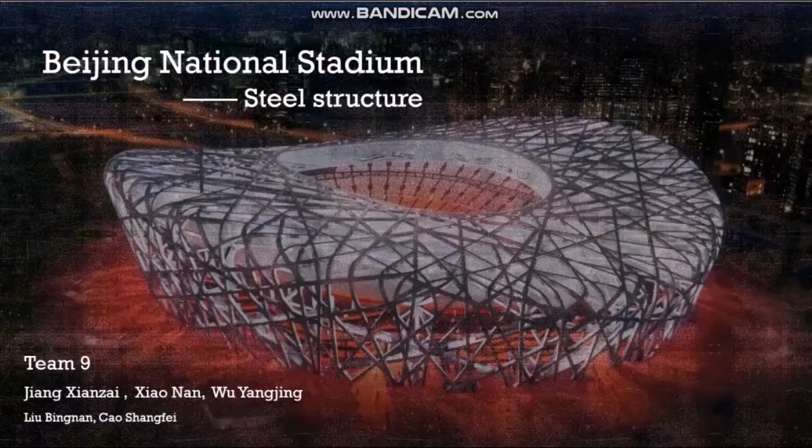Cao Shangfei. This week, we will introduce the steel structure of Beijing Stadium. The content is foundations and twisted element, challenge, and superstructure.

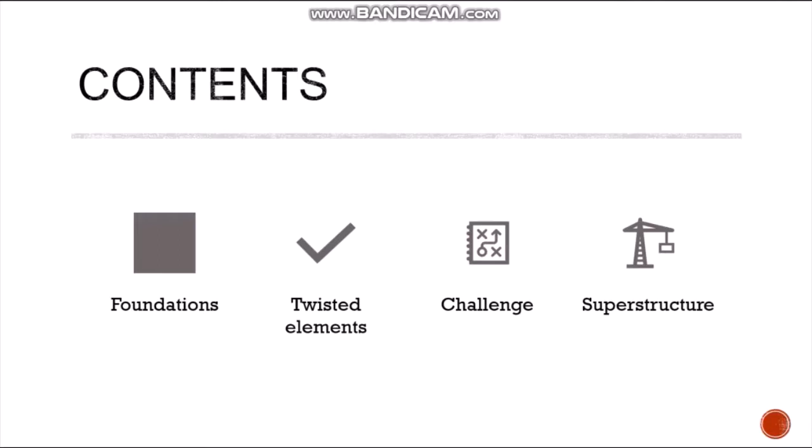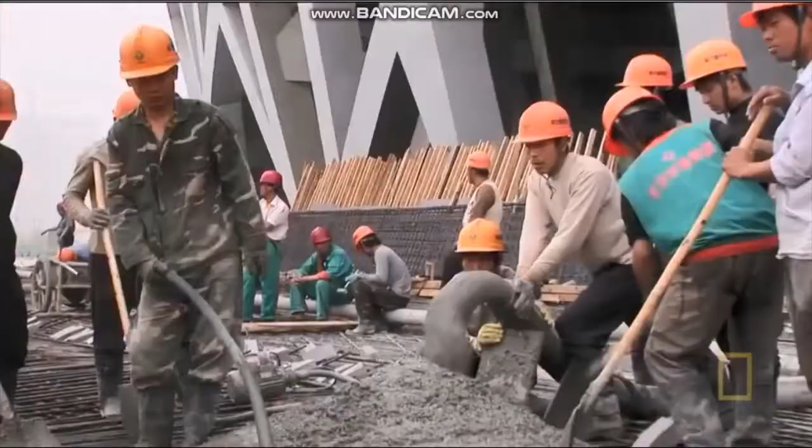Henry Zhang of the National Stadium wastes no time and assembles thousands of workers. The construction accelerates. We put in 7,000 people working around the clock in 3 shifts a day.

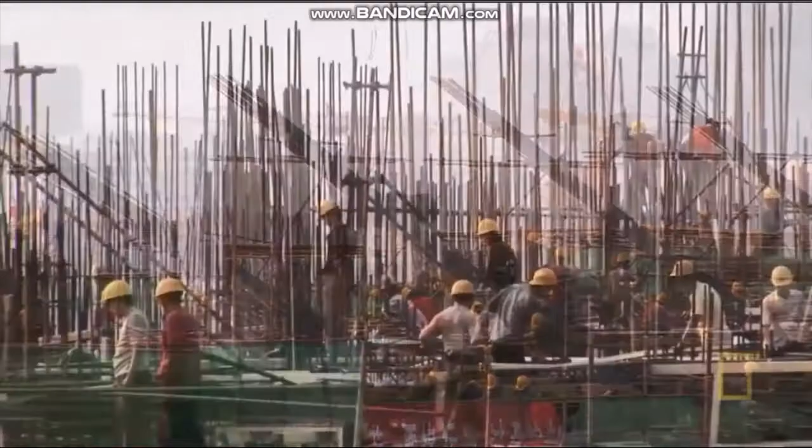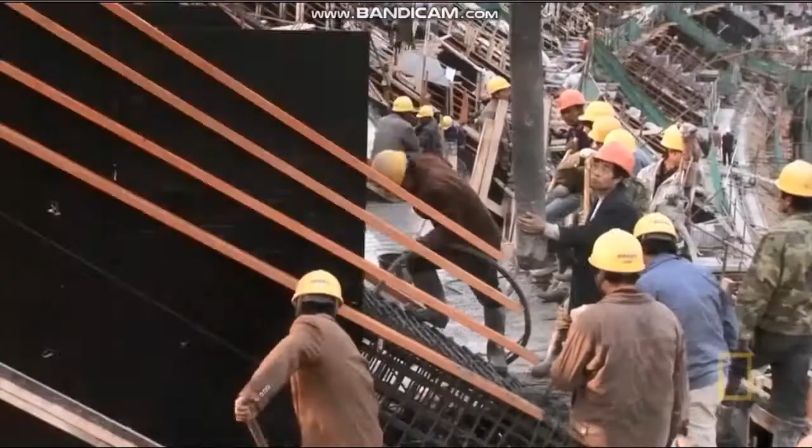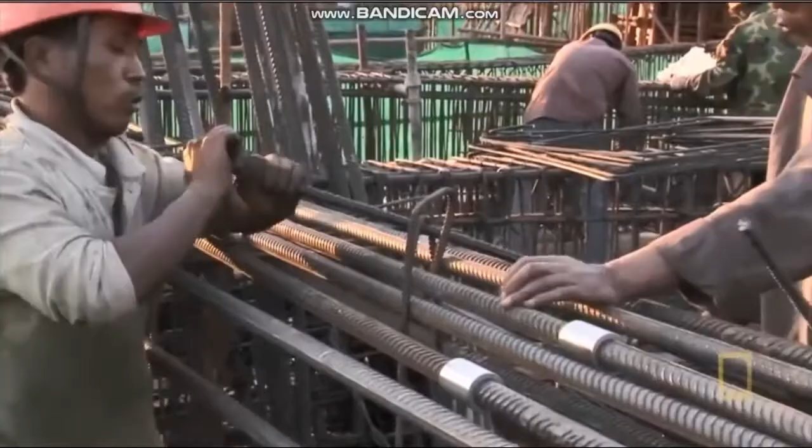The crew must force the concrete to defy gravity. It needs to be pumped up from the bottom of the forms through reinforced steel beams which strengthen the concrete. But the thick wires are slowing them down, and they still have 4 floors left to go. With less than 6 months before winter, hundreds of tons of concrete must be poured at the site.

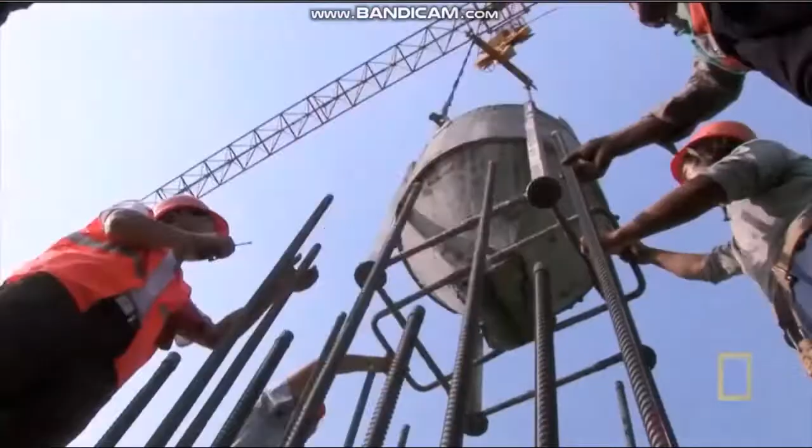First, look at the foundation. All vertical load-bearing elements are supported on the reinforced concrete pile caps supported by cast in-situ concrete bored piles with a diameter between 800 mm and 1000 mm, founded in the cobble/gravel stratified layer, about 38 meters below existing ground.

A plinth with a 1-story basement surrounds the concrete bowl area, resting on a shallow pad foundation on the natural subgrade at about 8.5 meters below existing ground.

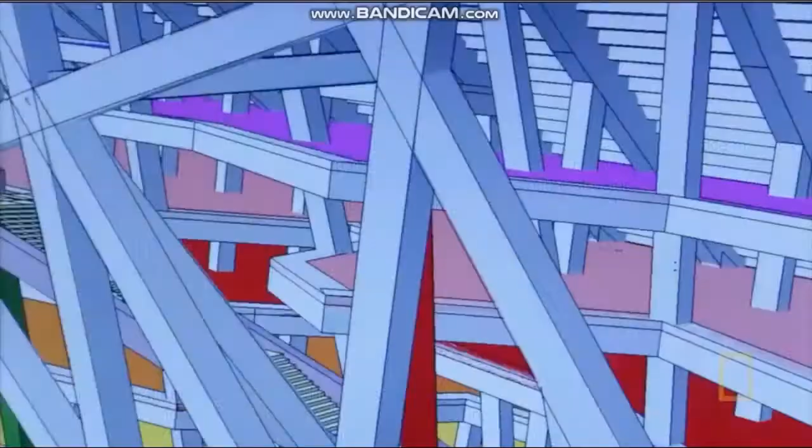Then we look at the structure of all the geometrical conditions within the stadium. This box section was defined using a control surface that was part of the structural envelope. The outer flank of the box always remains parallel to the control surface, resulting in a twisting, curving box section that changes as the element progresses along the surface of the structure.

The way the geometry was defined resulted in even the most twisted element being formed from developable surfaces. This means that the individual surfaces forming the box sections could be flattened out and cut from a flat steel plate, and then rolled to form the fabricated box section.

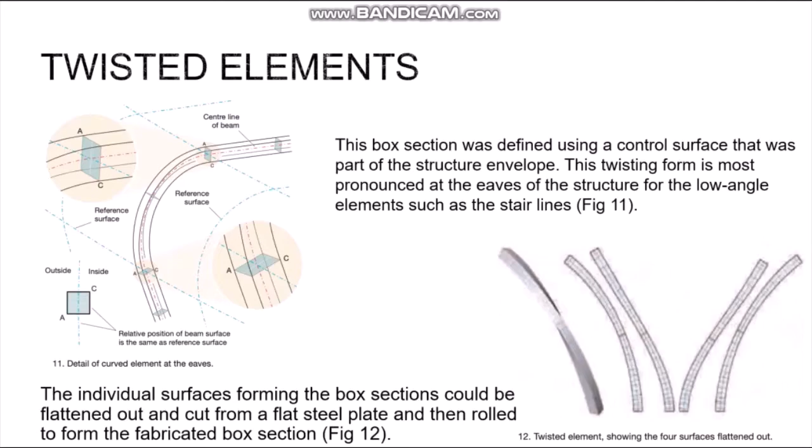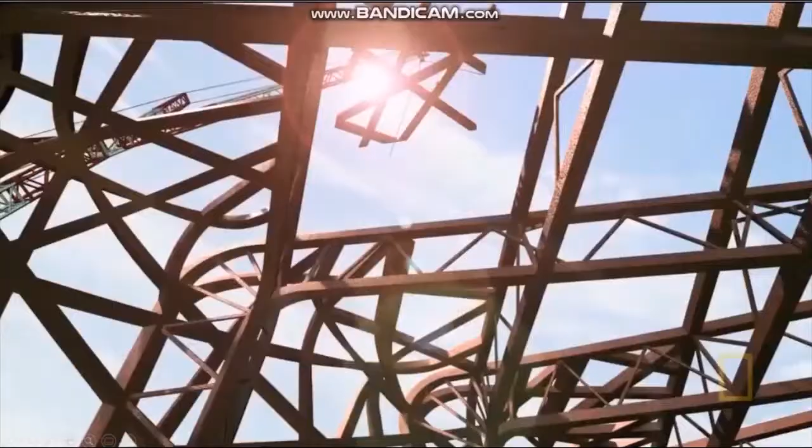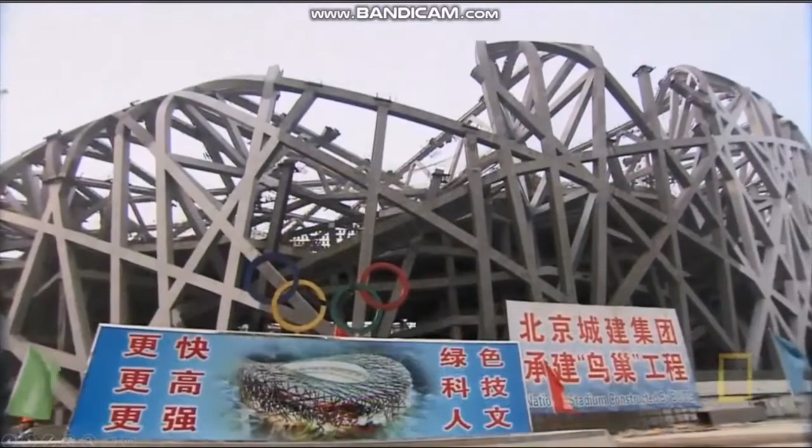The very long 330 meter span caused the seismic design to be significantly different in several ways from that of typical tall buildings. For instance, limiting interstory drifts and the detailing for ductility were insufficient for the bird's nest roof structure. It could have collapsed straight downwards without lateral sway, due to damage to its gravity force resisting system from vertical earthquake ground shaking alone.

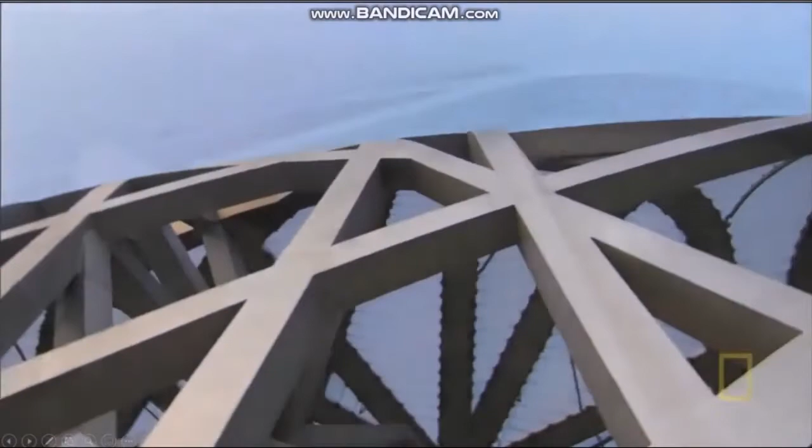The long span also causes the strength capacity of the primary truss members to be taken up primarily by gravity loads. The box section top chord and diagonal members in the primary trusses are subject to high axial compression forces under gravity loads, and will sustain damage and degrade the strength due to global as well as local buckling.

Ductile detailing measures for the bracing members in special concentrically braced frames were thus insufficient to prevent collapse of the roof. It was necessary to limit the post-buckling axial shortening of the top chords and the compression diagonals of the primary trusses, thereby limiting degradation of compressive strength.

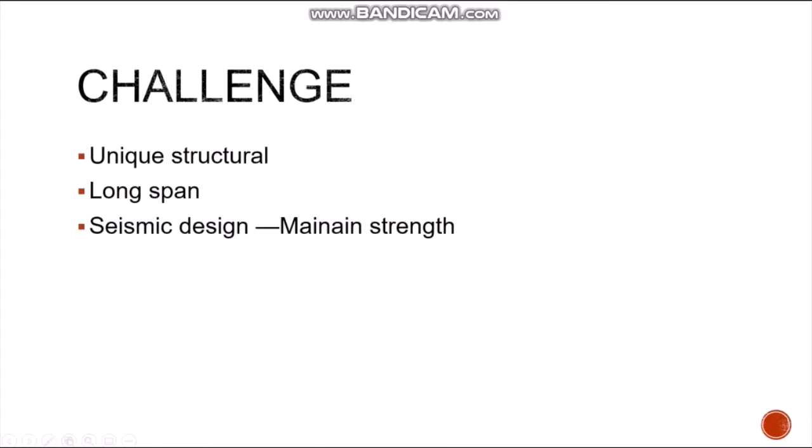The bowl is split into 6 segments with 200 mm wide movement joints between them. Each segment forms an independent structure with its own stability system provided by column beam frame action, and a concrete staircase and lift core. The 6 segments are between 120 meters and 150 meters long. The movement joints that separate them are continuous through every floor of the bowl, including the terracing.

The lower ground level is of 500 mm thick flat slab construction, acting as a floor diaphragm to tie together the foundations. The slab thickness changes due to the increasing span caused by the tapering of these grid lines.

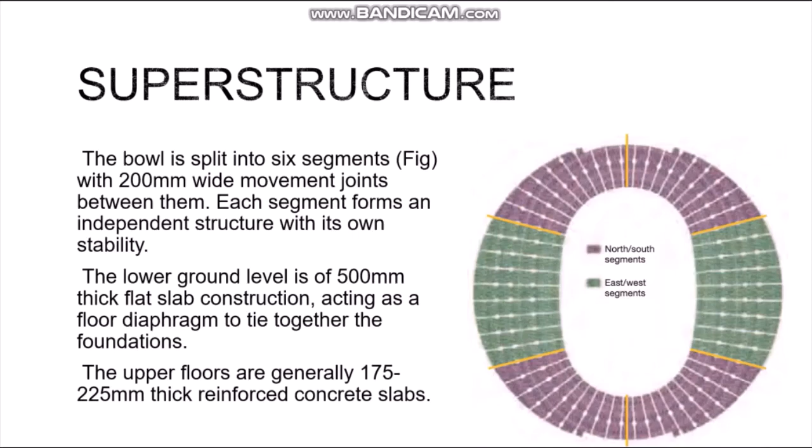And next week, we will introduce the roof technology of Beijing Stadium.